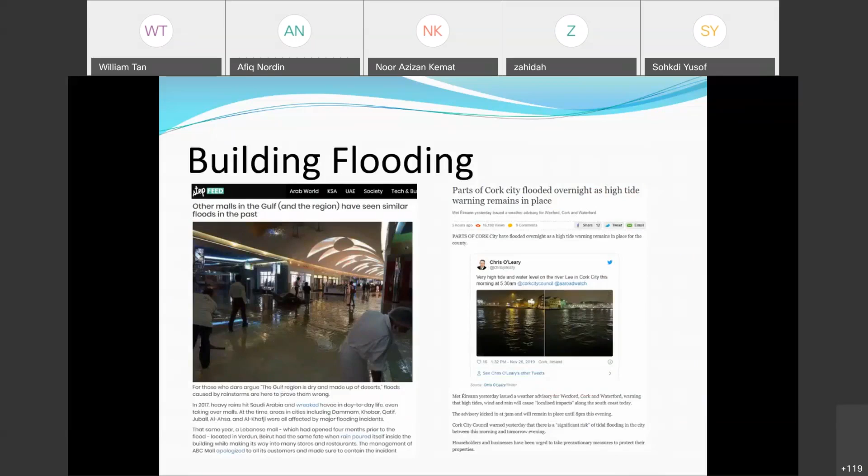Flooding can also occur when the water is coming from the sea. So like in this example in Cork, Ireland, you got flooded because of the high tide. So these are some pictures from various places that you can see.

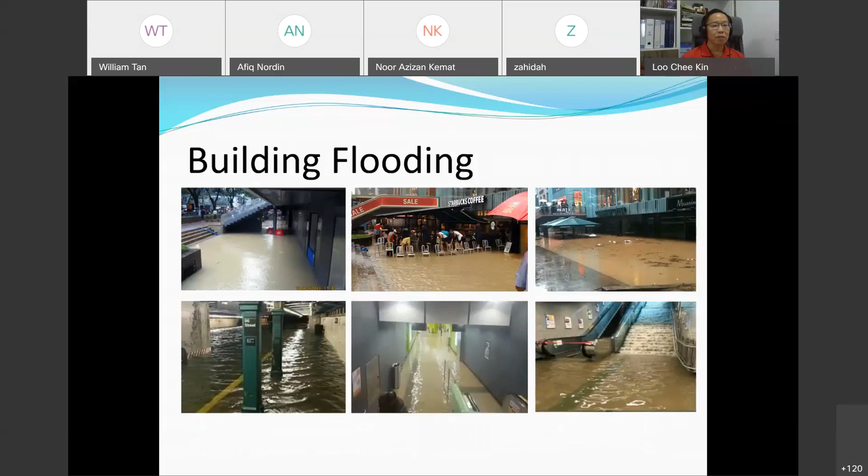When flooding happens, it causes a lot of inconvenience to people. There's also a lot of economic losses. Being insurance people, this group here, we're very interested in the damaged goods caused by flooding, interruption to utilities, infrastructure.

So what is flooding? This is a very simple definition. In a very simple definition, I'm not talking about what is in the policy wording, but flooding is basically for laymen and for all of us simple people, means that flooding is where water is not supposed to be.

And the second definition is water at the wrong place at the wrong time. That's called flooding. So when the rainwater comes down in the agricultural field, it's a good thing. But when too much comes down, like China now, it becomes a flooding issue. And this is where flooding, the simple idea, is too much water.

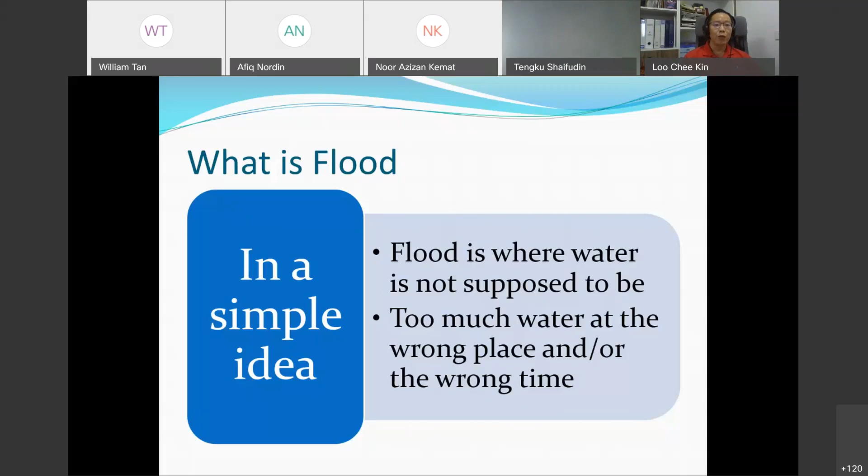So what are the types of flooding that we see? It's due to heavy rain, inadequate drainage that causes a lot of flash floods in our context in Malaysia, tropical storms, so it can be typhoon or hurricane that brings a lot of storm surge as well.

There's also failure of protective devices, failure of dams, disused mines, aquaculture ponds. There's also high tide, like I mentioned earlier. And the only mechanism of flooding that in Malaysia we don't get is the melting of snow. But all other forms of flooding, we do get it depending on where you are in Malaysia.

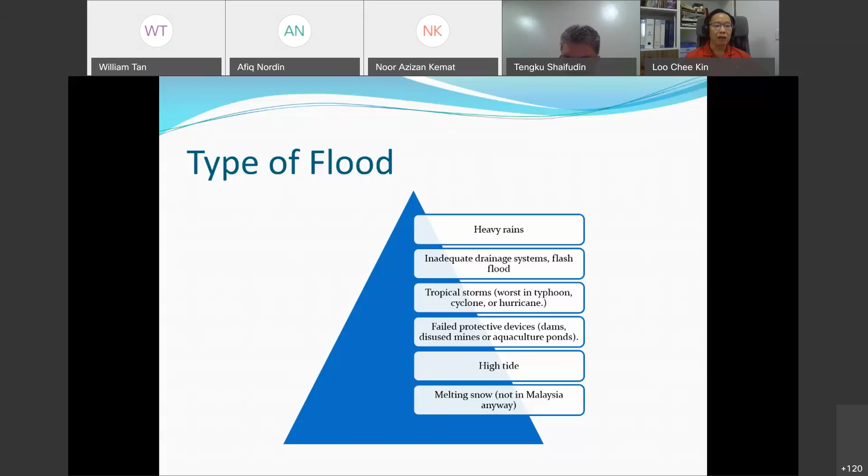So there are various strategies that are formulated and put into place for flood mitigation. Naturally, if you raise the building high, everything is built high, then you're out of the flood zone. So ideally, some insurance companies will say build it above the 500-year flood level.

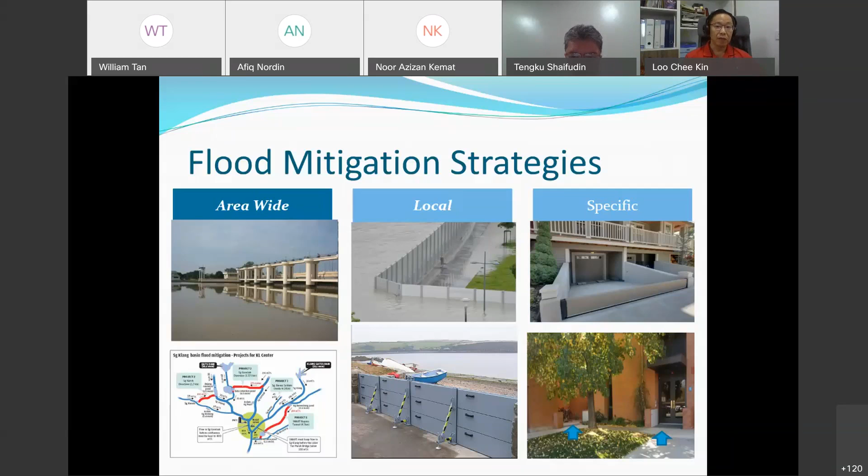But in any flood strategy, you always must look at the practicality. So for example, somebody built a bund around their house. That's good, but you need to drive in, right? You don't want to climb a wall every single day you get in and out of your property. So when you have an entrance and you do not protect that entrance, eventually the property is going to get flooded.

So likewise, if you have a house, you say, I can put in sandbags. There is a limit of how much you can do with a sandbag, because like I said, after the flooding, what do you do with all that sandbag?

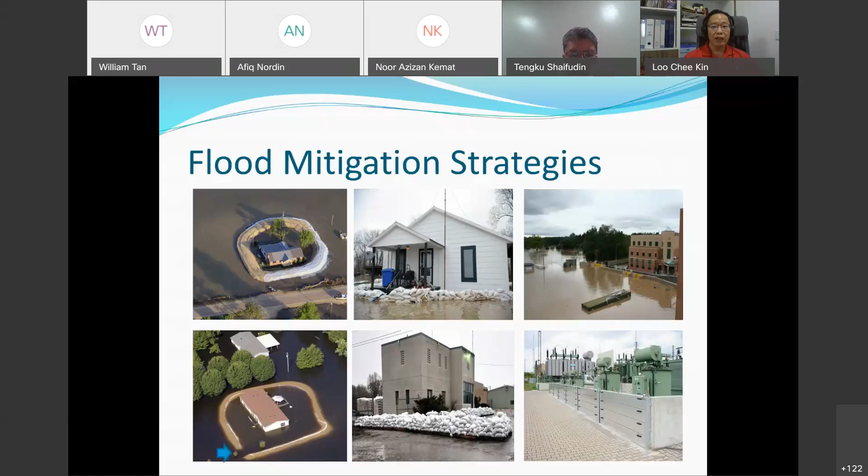Now, is it that difficult? Well, surprisingly, sometimes even when I talk to my fellow engineers, engineers tend to over-engineer the solution. But it's not the case because water follows a very basic principle: water always flows downhill due to gravity, and it always tries to take the path of least resistance. So if a solution can be found to divert or block the water, that's great.

Now, the bad news is that if water gets into any space, fluid mechanics kicks in and it will move together and fill the space. So if you have an underground space with even a very small opening that you do not protect, the water is going to eventually flood the whole basement. That's what you see in some of the earlier pictures. Underground subway stations get flooded quite badly because water gets in through the staircase, and not only do you damage the building, you will damage all infrastructure within the tunnel as well.

So that is why below grade space, especially from an insurance perspective, is given a lot of attention, because clearly it is below ground, so rainwater or flood water is going to come from the ground. When this water gets into that space it causes a lot of damage to the building because, as we know, ground floor is a premium. So by design, architects like to push utilities and everything down to the basement, including car parks. And in today's world, many customers would actually use those underground spaces as storage as well, for their archives, for unused furniture, like in hotels and F&B businesses - they always have that sort of storage in below ground space.

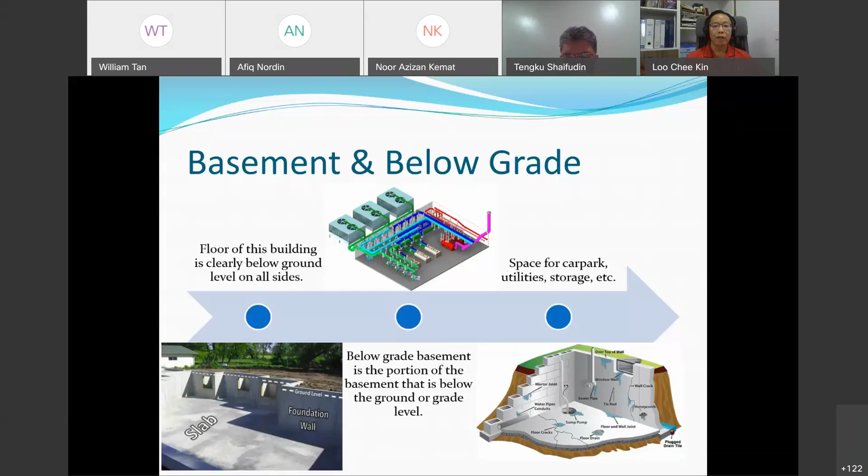Now, when you have below ground space, there's a lot of potential where water can seep through. Like you can see in that picture on the bottom right, you have cracks, floor drains, openings for fresh air - all these are potential spots where water is going to seep in. So as the overall basement and below grade protection strategy, we need to look at how you prevent water from getting through those openings, the windows, the ramps, the doorways, and even any sewage pipes that may be connecting from the building out to the public system.

So these are the overall strategy of flood protection. You need a perimeter barrier - this can be permanent or temporary, and it will keep the water out of the building. It's designed such a way that it should be sealed together with the building structure or the building opening, meaning doorways and ramps that you may have for car parks. Then you have opening barriers - specific protection that is put in place in those openings.

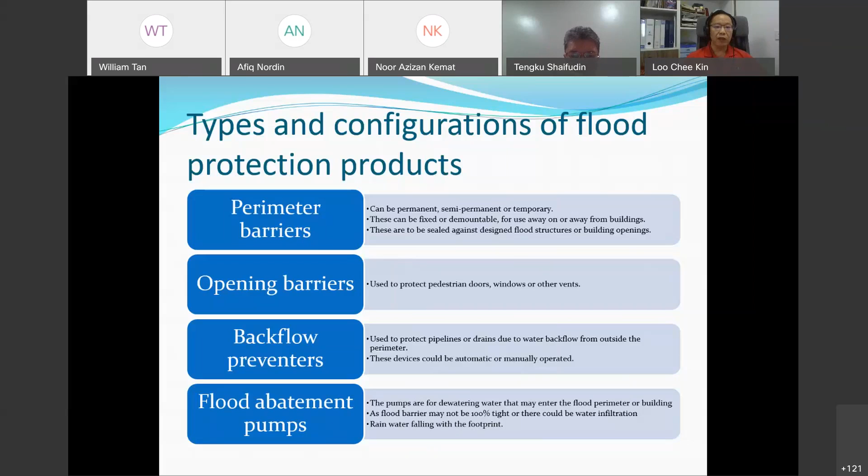So why are we so concerned about flood water? Because people always see videos when the East Coast is flooding and they see kids swimming in the water and think, hey, that's great, I can play in the water, right? But we know flood water is not clean. It has mud, sand, stone, effluents - that means sewage. We have chemicals, because if you have upstream from the plant, a chemical plant, a palm oil plant, they use oils and chemicals, all these will be floating down with the flood water. There's also floating objects, as you can see.

Flood water washes trees and whatever is left on the side of the road, and these become objects moving together with the water. You also have animals inside there - it could be snakes, cockroaches, anything else. And flood water, as you can see, is anything but calm. It's moving, it has velocity, and it has head pressure.

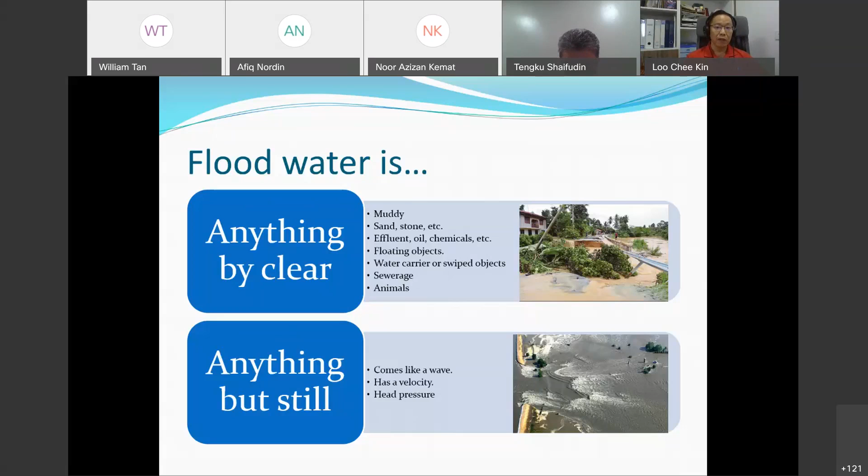And what do I mean by that? So in a very simple sense, velocity can come from something that's moving inside the water, or the water moving itself - that's why it's a big concern. And the head is the pressure that's exerted by the water, meaning the deeper the water is, the higher the pressure is going to exert at the bottom.

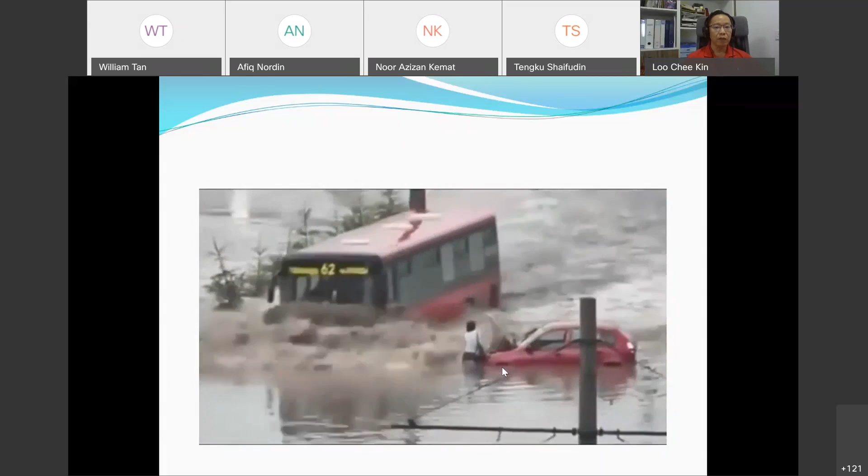Now, I'm not going to go through too much more technical information, but this video can give you an understanding of why it is a concern. You can have still flood water for a while, but you always get that gung-ho hero who wants to drive through the water. And you can see when a bus or truck drives through the water, it's going to displace the water and create a wave.

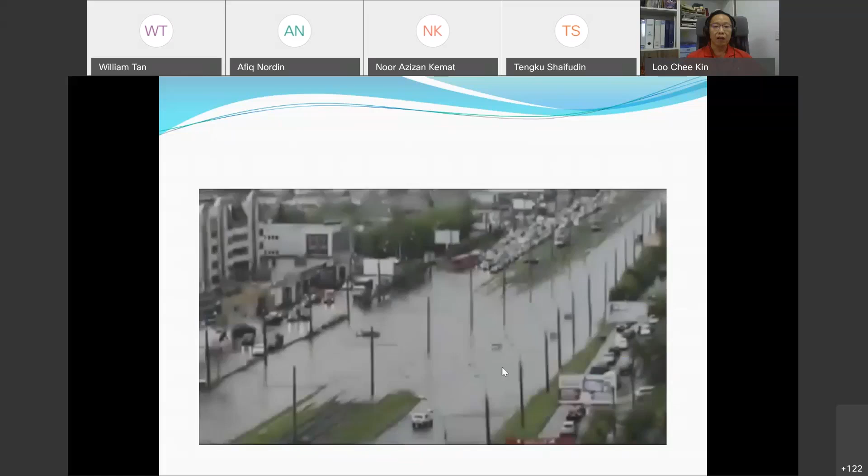So if you have a flood barrier that is not built in the correct manner, and a bus passes by it and causes a wave that breaks it, what's going to happen to the building? It's going to flood it. So that's why IEM created an initiative to come out with this guideline for performance requirement of flood abatement equipment.

So we initiated these guidelines in November 2018, in order to fulfill a need of the industry, because we see there is a gap currently in Malaysia that there is no specific standard talking about how you are supposed to build such equipment, how the manufacturer should build it, how they're going to install it, and most importantly, who tests it, and finally, how do people, survey engineers, give credit to it.

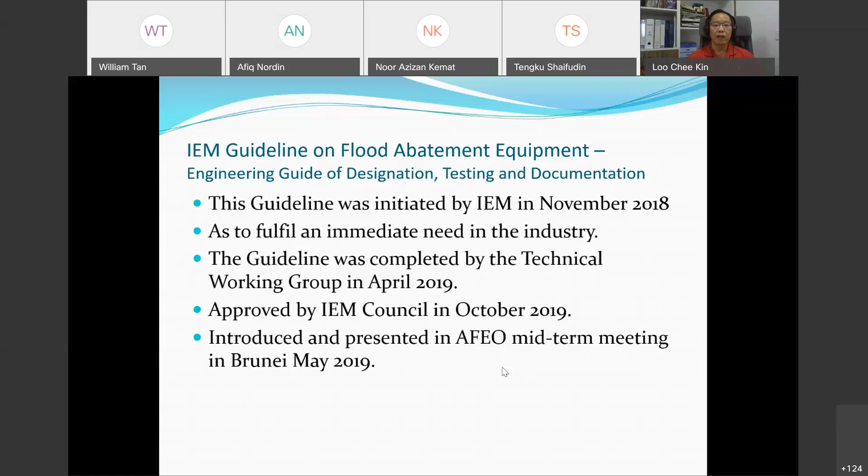So we set about having a few technical working group discussions, and we finalized that document in April 2019, and that document was finally approved by IEM Council in October last year.

So you'll be wondering, what is the purpose of having such tested equipment? It's to try to create a uniform standard so that engineers can use the specification without repeating it again and again. So for end users, they know that this equipment has gone through rigorous testing and will meet the performance requirement. Likewise, for contractors, they know that they don't have to engineer the requirement from scratch because it's already meeting some standard. And lastly, for people like authorities and insurance companies, you know that if this meets this particular guideline, you don't have to go back to scratch and reassess whether it's going to do the job, whether it's going to stand the wave, whether it's going to perform.

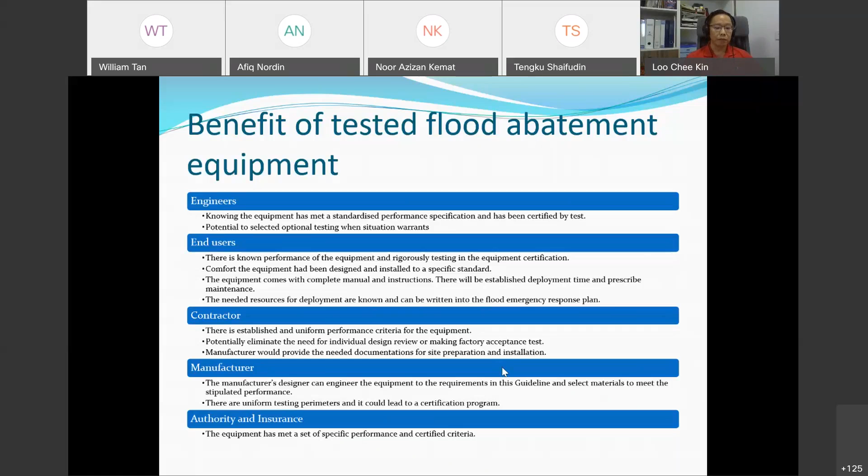So when we set up the working group committee in November 2018, we actually had people from different agencies, people from government agencies, the regulators, professional bodies, and also a representative from PIAM itself.

So a lot of the members, especially the representation from PIAM, we were very thankful because they gave a lot of good challenging feedback as to why we use certain parameters for the standards. And we also had input as to what tests are required to meet the performance. So out of that, we grouped it into 3 broad groups, and within these 3 broad groups, some of these will be what we call required mandatory tests. So hydrostatic testing, that means how high the water the barrier can withstand, is an important factor. So a barrier certified for, say, 1 meter height is only good for installation of 1 meter.

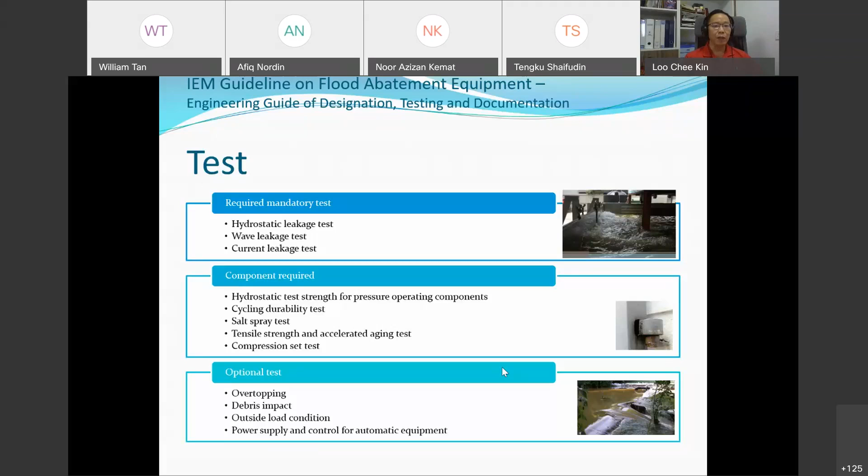So I'm not going to go through the technical detail because I can talk half a day on this. Now, more importantly, is equipment documentation.

In this particular guideline, we spell out very clearly what documentation is needed. So the manufacturer needs to state clearly what is the deployment time.

If the flood barrier takes 2 days to install and the flood warning is only 1 day, it's as good as none. So the deployment time becomes important because, as surveyors, when you go down to site, you look at the equipment and they say, I need so much manpower, but they don't have the manpower and the tools to install the flood barrier. How do you debate with them?

But if the documentation says you need this many people, it can be deployed in 3 hours, and these are the tools required, that's fine. That's how we can give credit to it. So the tools, everything, if it's a complicated system, should be documented so that the end users have that equipment in hand.

Now coming to the last few slides here, we also included some appendixes in the standard itself. Appendix A is talking about the testing facility. B is talking about how to design. C is the climate change factor. I mean, we are all very concerned about climate change.

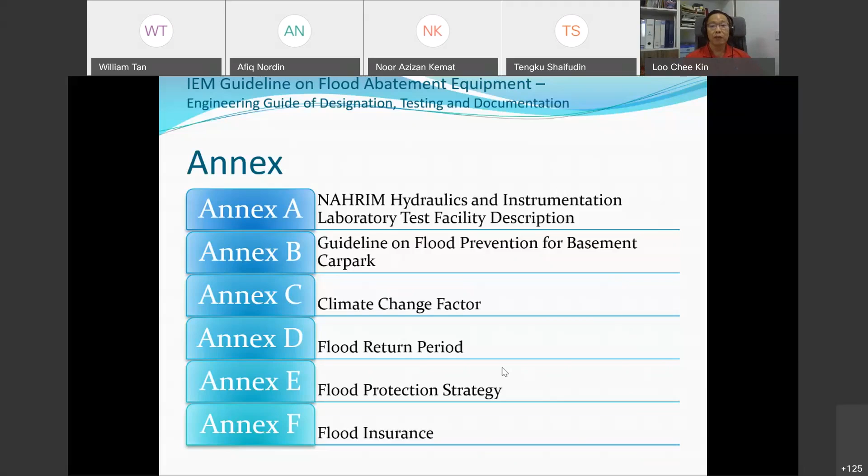So this is NAHRIM. They actually have a full-scale testing facility in Seri Kembangan. As part of the working group, we actually paid a visit to NAHRIM and looked at their facility. So Malaysia actually has a facility able to test such equipment if the manufacturer is interested.

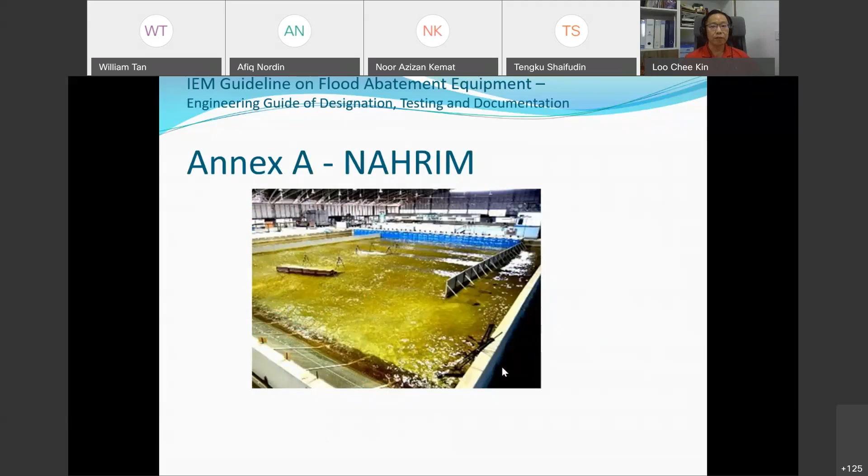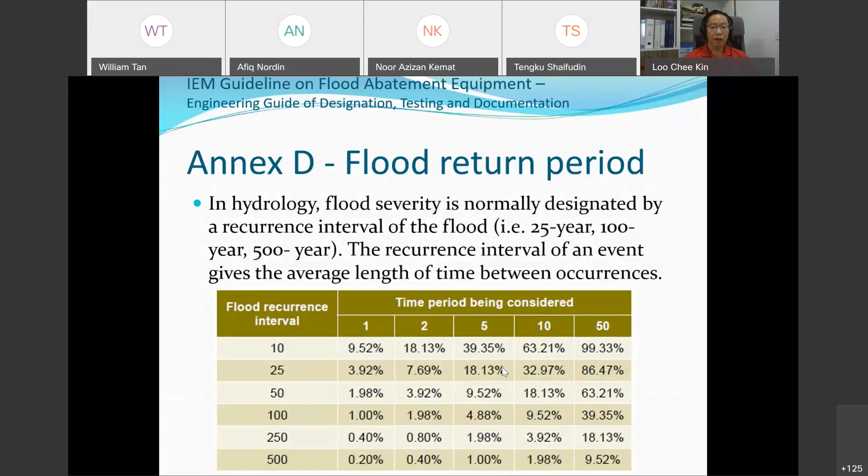We also provide background information on the climate change factor, referencing documents that engineers or manufacturers can use. We will explain the concept of return period, but I believe for this group of audience here, I don't need to present this, because we have underwriters and surveyors who are very well versed in this.

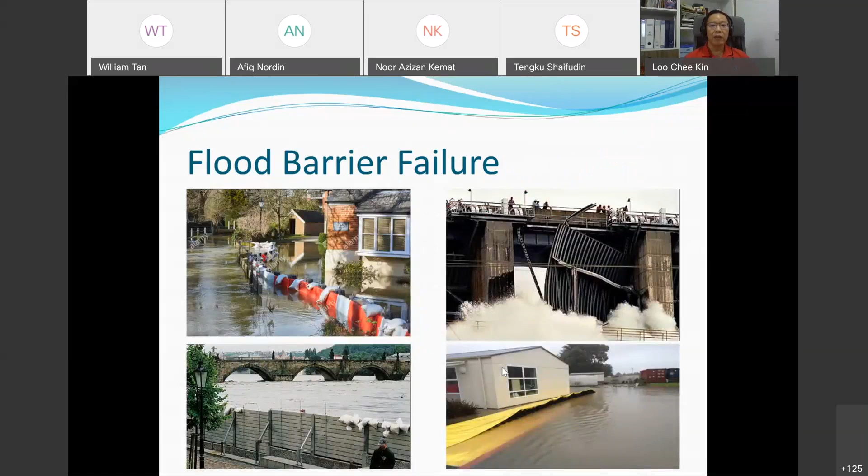So our main concern in putting together this standard is flood barrier failure, because flood barrier failures affect everybody—the community, the person, the family—and ultimately, if it's an insured property, the insurance people will have to pay for the loss. So we want flood barriers to be credited when they meet a certain standard.

So lastly, as a summary, flood can be predicted and mitigated in most cases. There are varied and many different engineering measures put into place, many flood solutions to mitigate and limit flood damage. But having product conformance and certification gives end users peace of mind that this has been tested and verified by a third party. If you go around, you can see a lot of do-it-yourself flood barriers that may not meet the job, giving a false sense of hope to people.

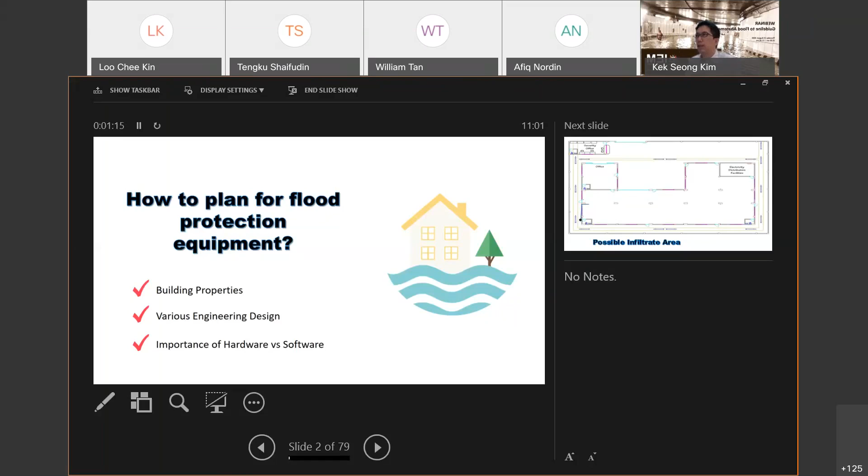Like just now, we talked about the flood barrier. When it comes to testing standard, Engineer Loo has already explained that to you all. Now, how do we apply it to the property? That is the application issue. So we want to explore how we use it effectively to protect properties. There are various engineering design considerations and the importance of hardware and software as well. What we mean by software is a person, a program that makes the flood abatement equipment become useful and effective. So let's take a case study.

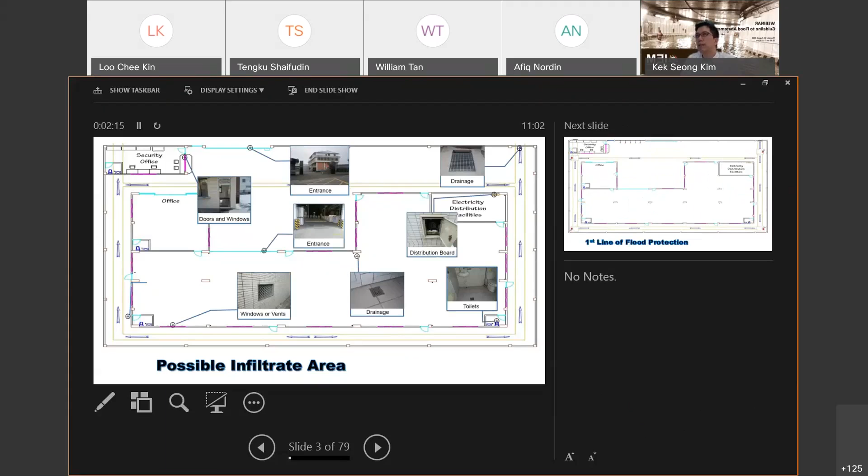For example, this is a typical layout of a plant. If we look at the plant, we know this is a potential flooding area. What can we do with it? So what we normally do is analyze the place. This is an outer barrier, and this is a building barrier, so we put it into two different perspectives. First, we look at the outer layer: water can come in from the entrance, from the drainage, from the doors and windows. For the inner layer, water can come in from the building entrance, distribution board, window and vents, drainage, and toilet. So these are the possible areas where water can come in.

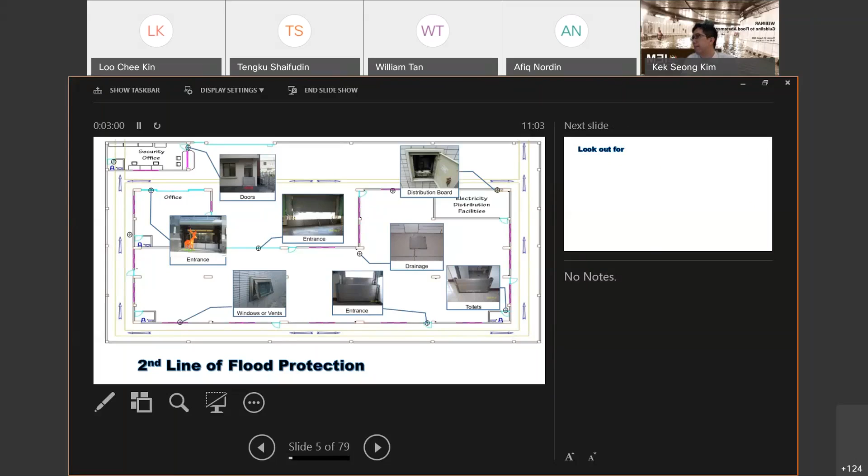So when we want to apply that, we have to look out for whether the strength of the wall is sufficient to take care of the hydrostatic pressure or not. Not only the equipment itself - because if you build strong equipment but the wall cannot withstand it, the whole thing will collapse. Look at the cracks and holes on the wall, pipes and drainage, and make sure we have a pump to pump the excess water out from the building to outside the barrier. If there's a puddle of rain indoor, use a catch basin and water pumps in the factory to drive the water out. And connecting pipes like stopcock drain cover pipes are good to have to stop water from flowing in.

And for the ground pipes, we can apply sealing foam to seal it off.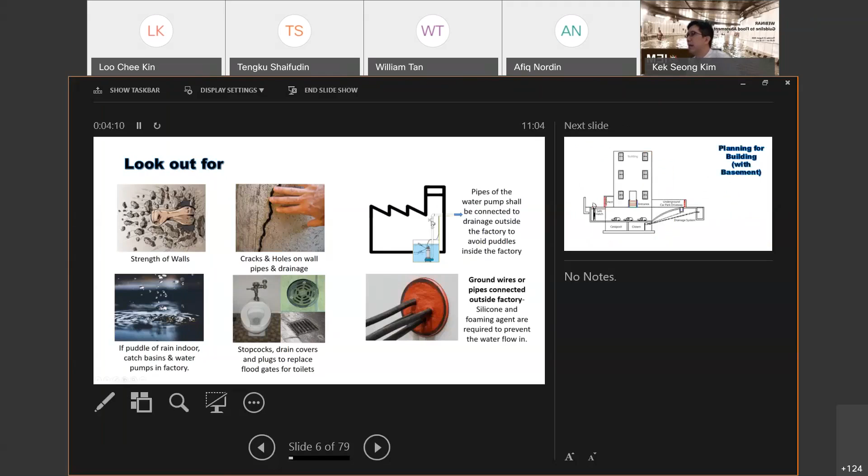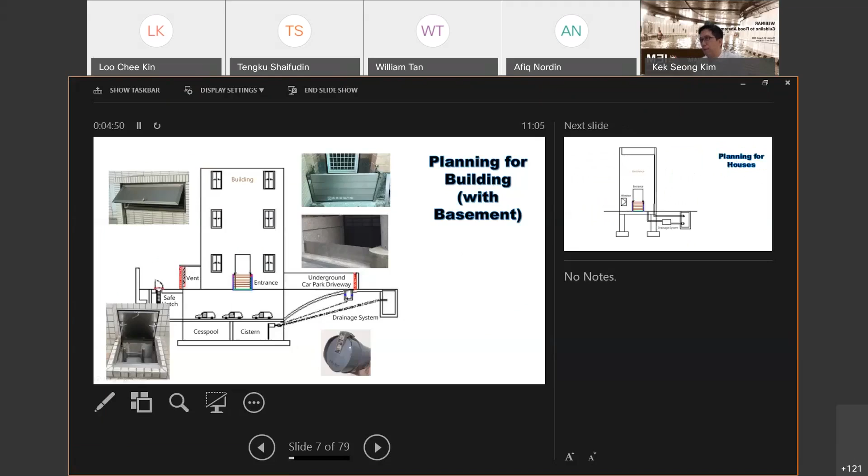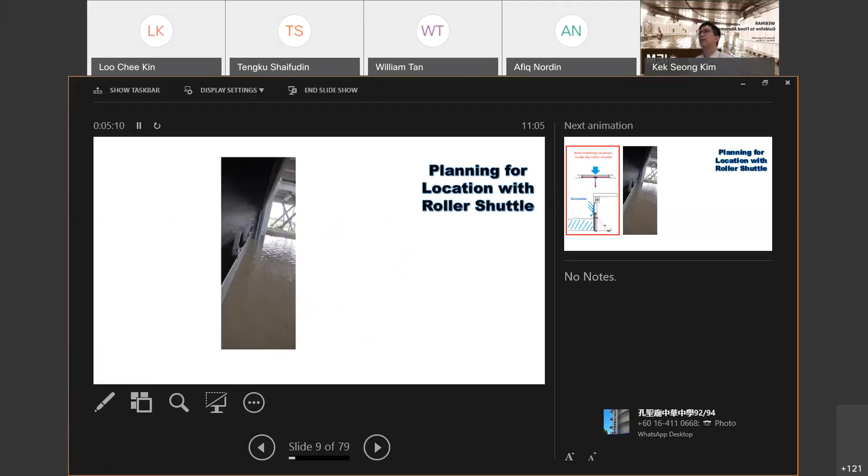So for a typical building, when we look at it in 2D on the vertical side, we can see if there is a basement. What we can do is have the window, the floodgate at the entrance, underground car park, driveway, the hatch door, safety hatch here, and a non-return valve. Then for normal houses without an underground area, it's rather simple. But if you're dealing with a factory or warehouse, you have a big roller shutter, so we should also consider whether to keep the floodgate before or after the roller shutter.

So there are some pros and cons. The best recommendation is to have the roller shutter outside against rainwater, and only inside do you have the floodgate. This helps prevent the splashing of rainwater. Whereas if we put the floodgate in front of the roller shutter, chances are rainwater passes through the floodgate, and some water still seeps through the roller shutter. So this is something we can look into in fine detail when planning for floods.

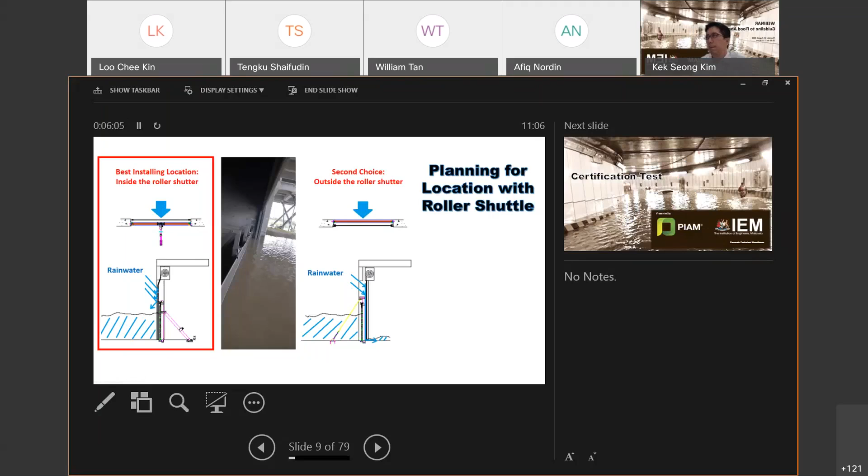Certification test: I have some documentation of the real tests that have been done. For the window, the impact test is done like this. For the sluice gate, the impact test is done like this, and for the demountable floodgate, the impact test is done like this.

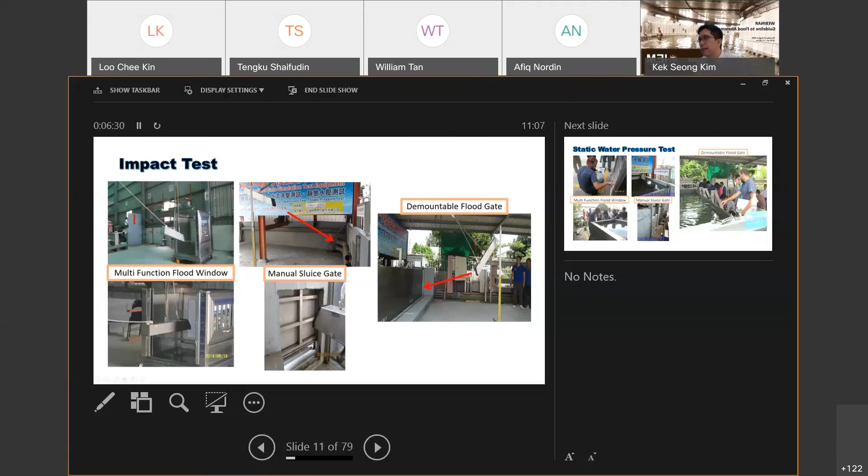Static water pressure test: the water is filled up to the max, and then after an hour, 24 hours, or 48 hours, we see how much water seeps through the gap in between. So this is how the test is being done.

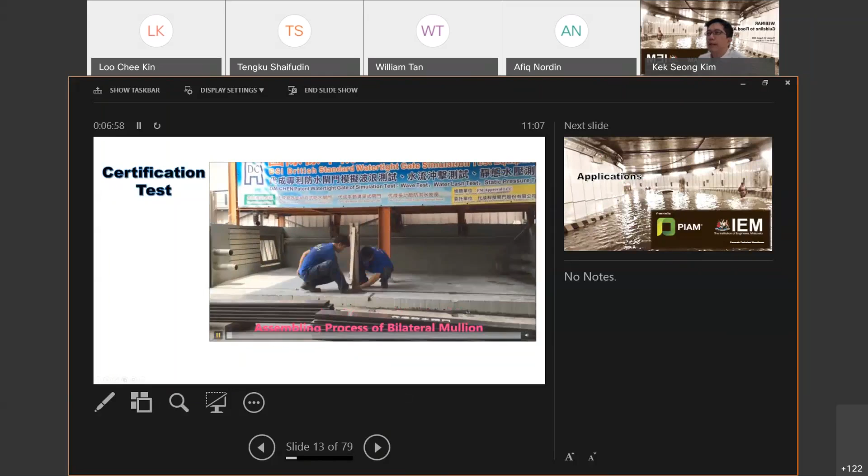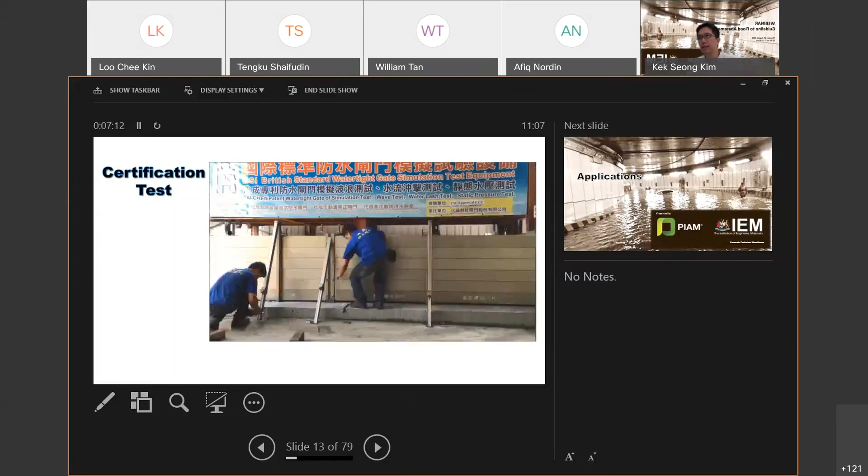When we want to do a test, the inspector will witness how the things are being assembled, whether it is repetitive or not, whether it can be reused or not, and how much time it takes to fix it up. Then here, we discharge the water.

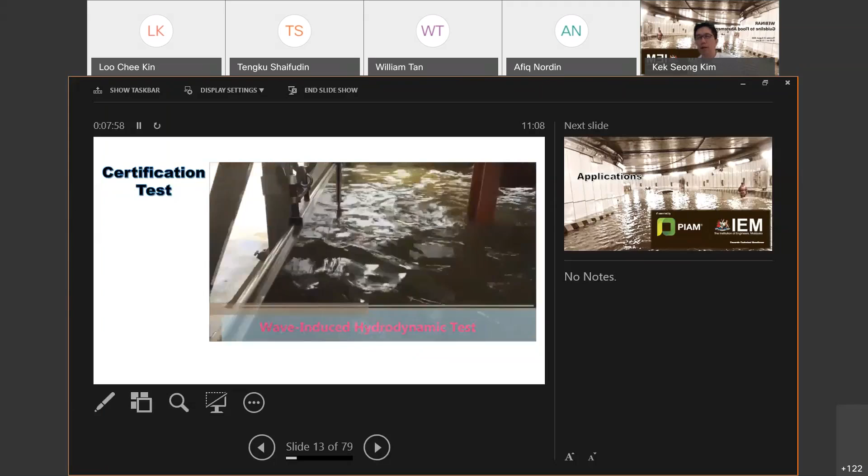Kim, can you show full screen? Your slide screen is not very clear. Sorry, you selected the wrong screen for the presentation. Can you switch the screen? Yeah, how to do it? Let me see.

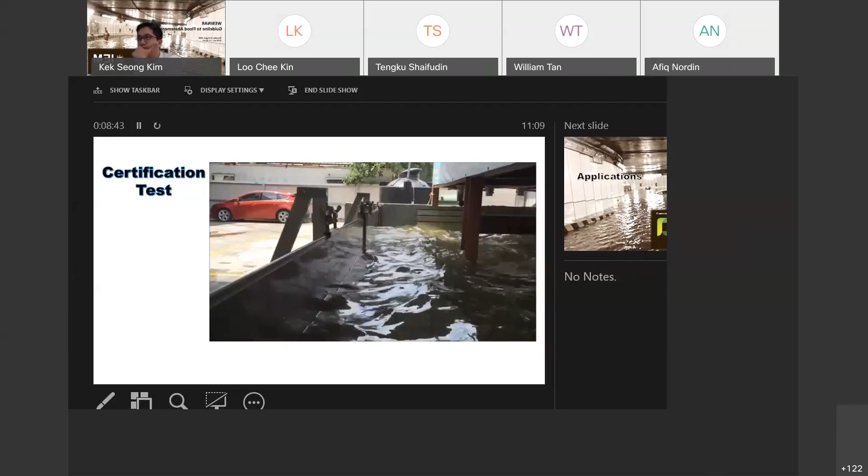You are not seeing the video? Are you all seeing the video? No, not at the moment. The pictures, but not the video. Okay, how to share the video? If you're working with two screens, you need to switch the presentation screen. Oh yeah, I'm working with two screens. So I should share screen two, right?

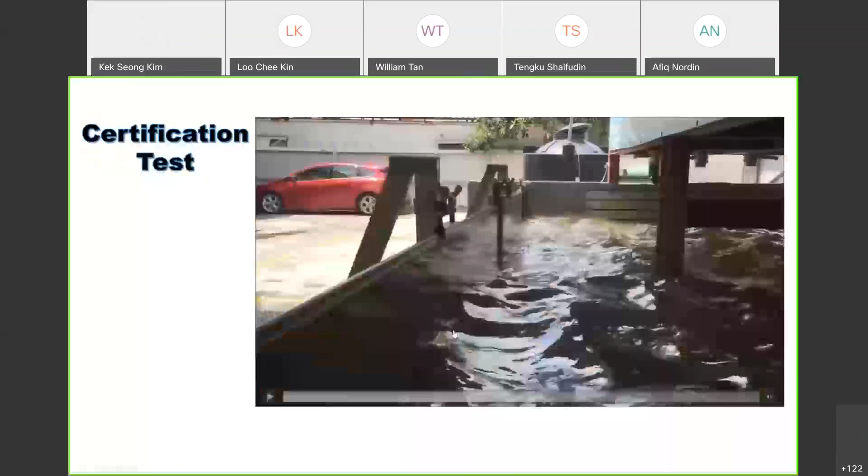You all see the video now? Yes, it's full screen now. Okay, sorry, shared the wrong screen. I'll restart the video.

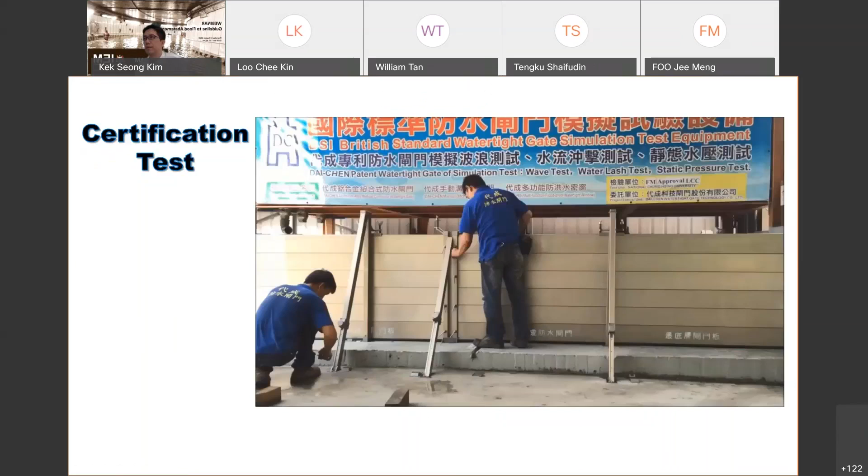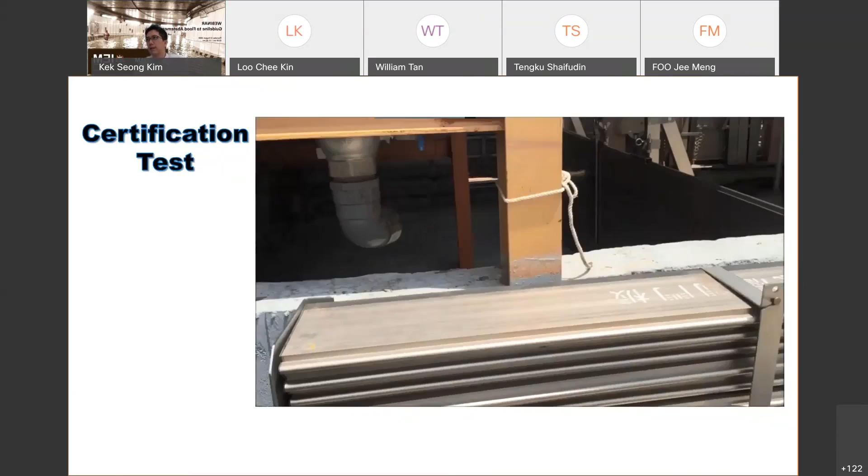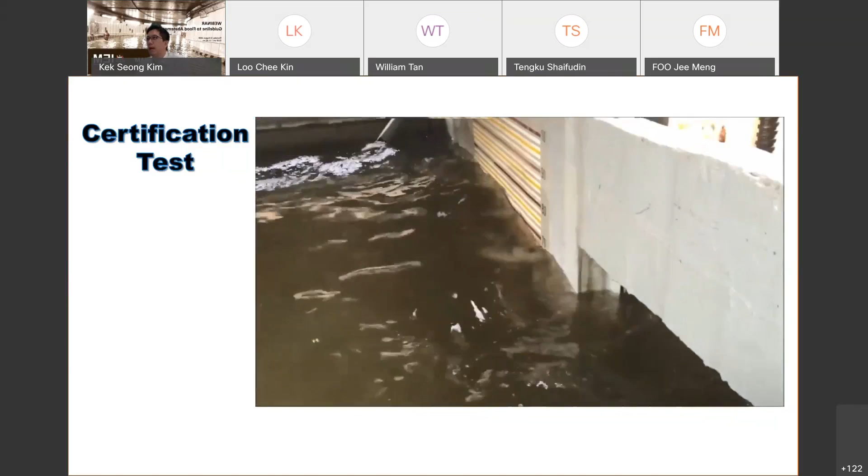So this is a test done in the witness of FM Global, an international company that also has the flood abatement standard. When they inspect and give accreditation, they want to make sure that the process can be done repetitively. This is a hydrodynamic wave test, creating the wave to make sure the flood barrier can still withstand the wave pressure.

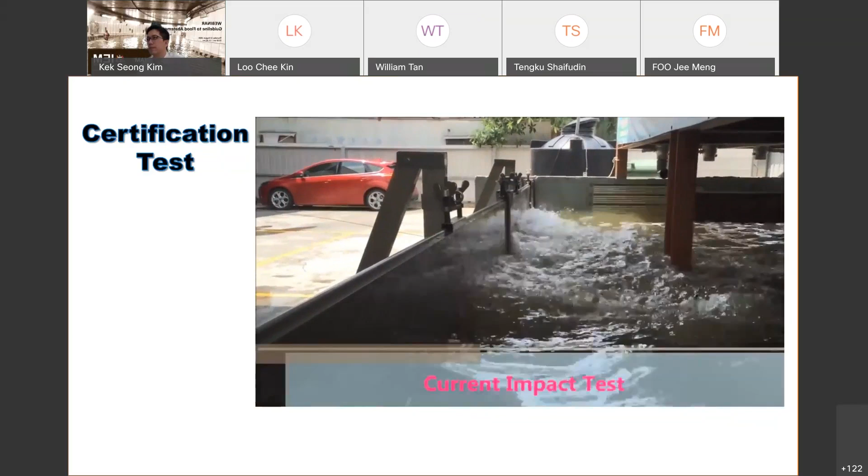This is the current test. The site creates fast water with a pump to simulate the current. This is the hydrostatic test.

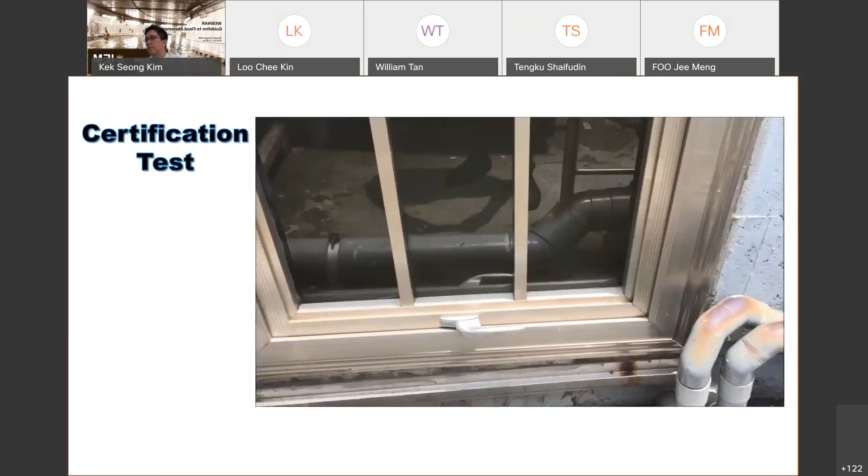And then this is the impact test being done. After the impact test, still no water can leak through. So that's how the certification is being done.

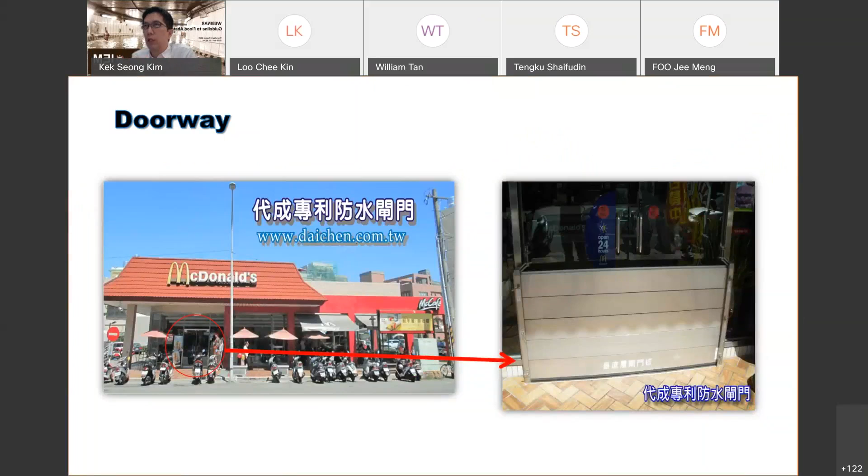When it comes to application, the design of where we want to apply it on the building depends on the creativity of the designer. So it can be at the doorway, the rearway, the wall extension, topping up the wall, as a window, riverbank, driveway, or entrance. That depends on the design application, so there are countless possibilities—you can design it yourself.

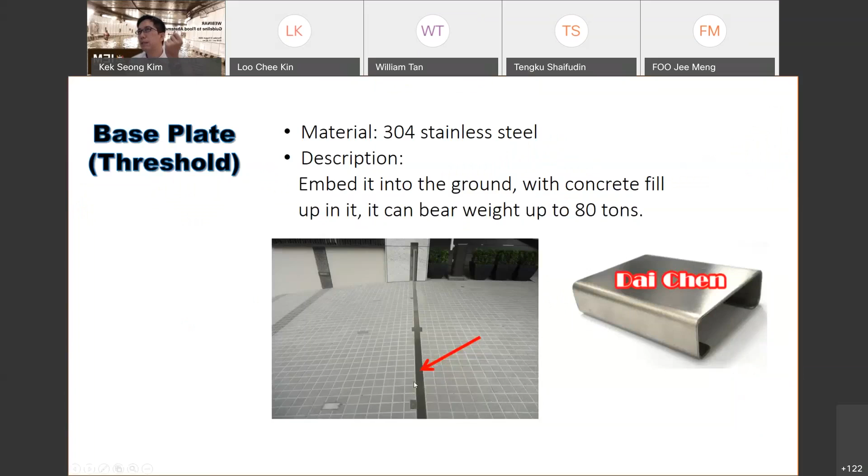The next one is the component design. We want to understand how each part, each component works. So you see, we have a base plate. The base plate is there to make sure the gap is sealed properly, and it's made of stainless steel.

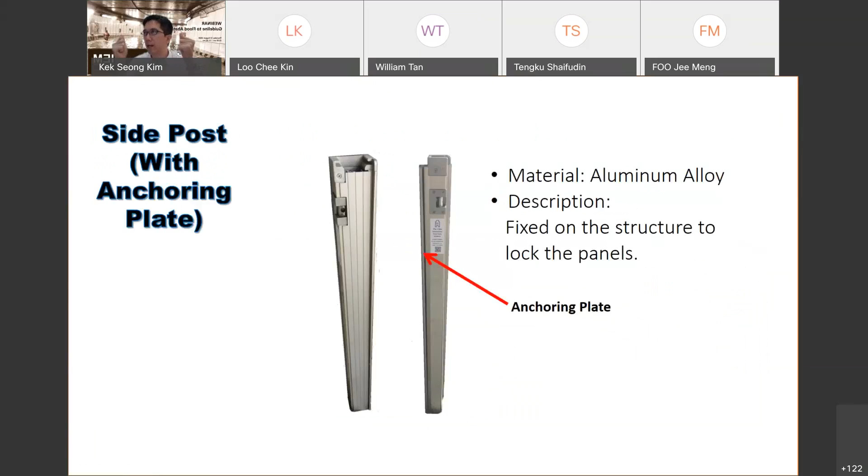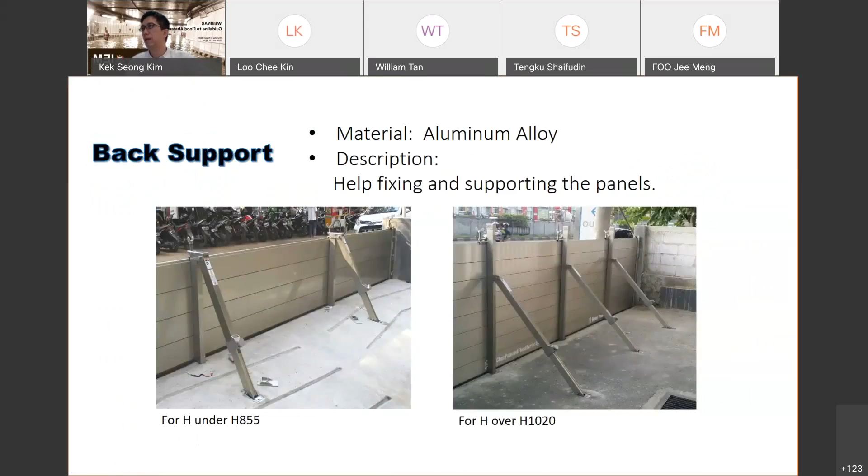When we want to install it in a very wide area, we need a middle post. We also have a back support to counter the pressure from the water, and this is the base to lock the pole, the post. The tightening lock is used to put pressure down on the plank so it can secure the seal.

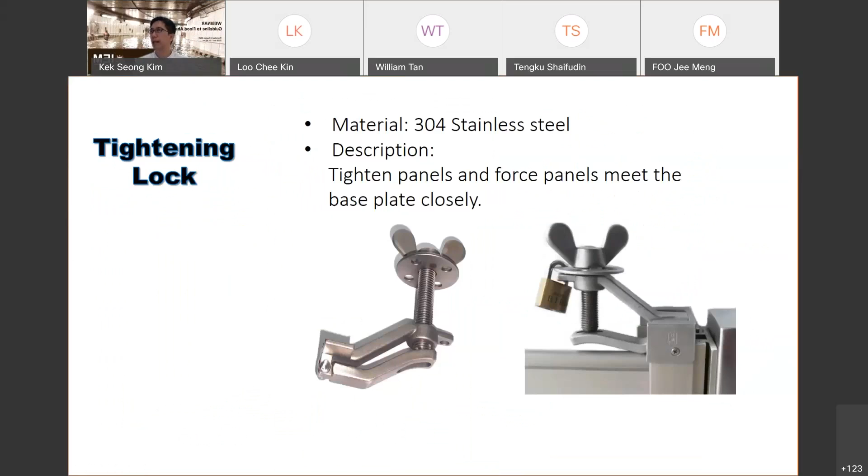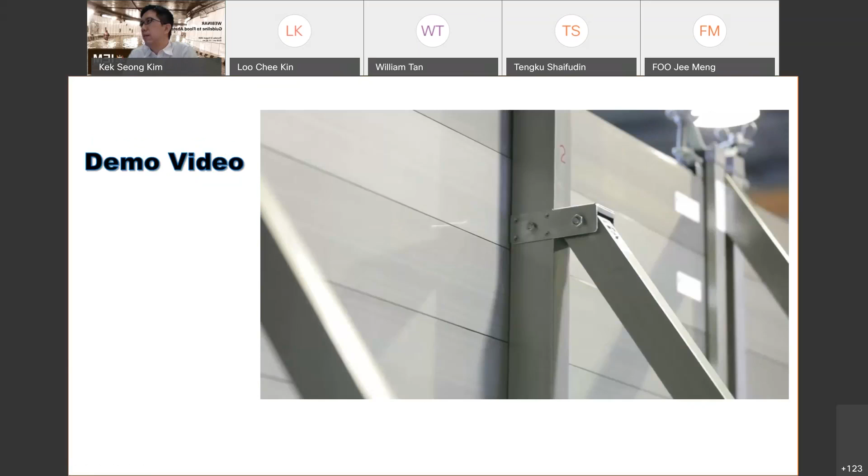So this video will show you how it theoretically works. This is a very simple video done by a Taiwanese company explaining how it works.

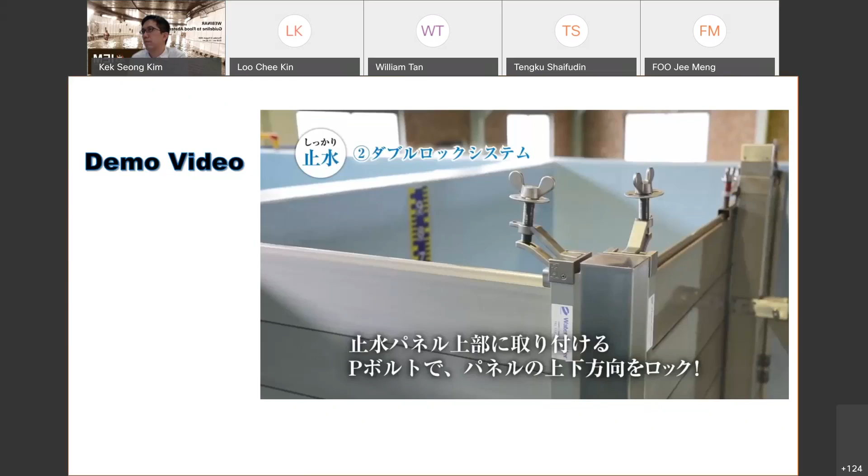This is a tightening nut to press the plank down.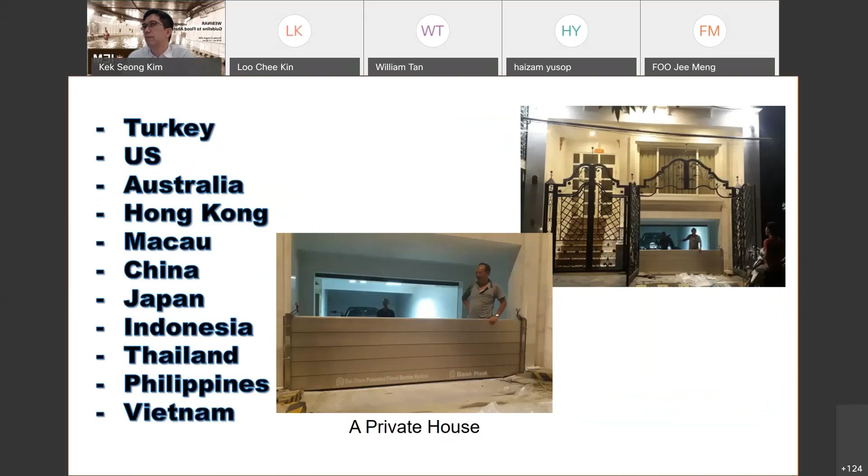When it comes to flood abatement, it's actually very important to have the software in place as well. That's why on-site drill and training is an integral part of the program. This is very important—if you put something in place and people don't know how to use it, or when you want to use it, it cannot be used, this is equal to none. So training is very important.

Flood doesn't happen every day, so when you want to do it, sometimes you forget. Training posters are important to refresh the mind of the operator. We also provide videos for the users as a reminder, for yearly or half-yearly trainings, so that they do it again and again until it becomes ingrained in their minds. Then you don't get panicked during the flood.

If you look at the whole process, for this size, it will take less than 3 minutes to fit everything.

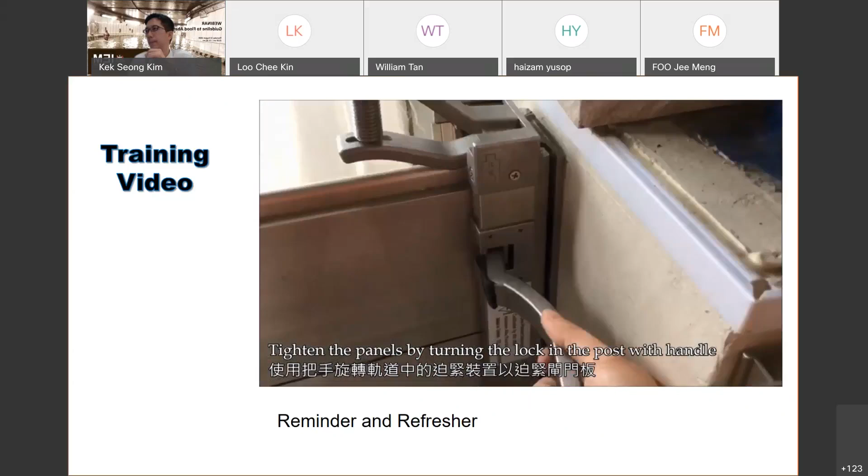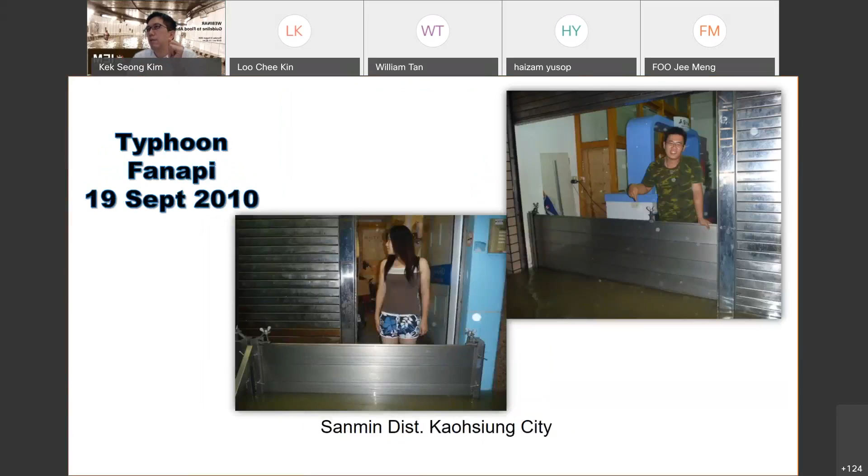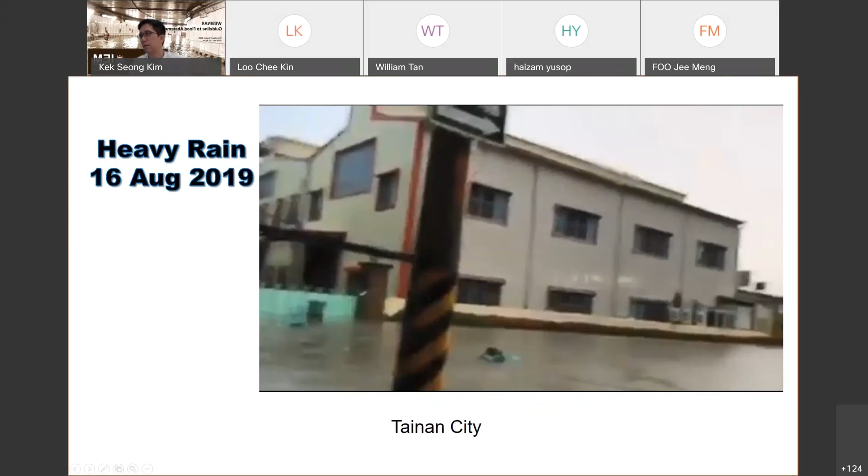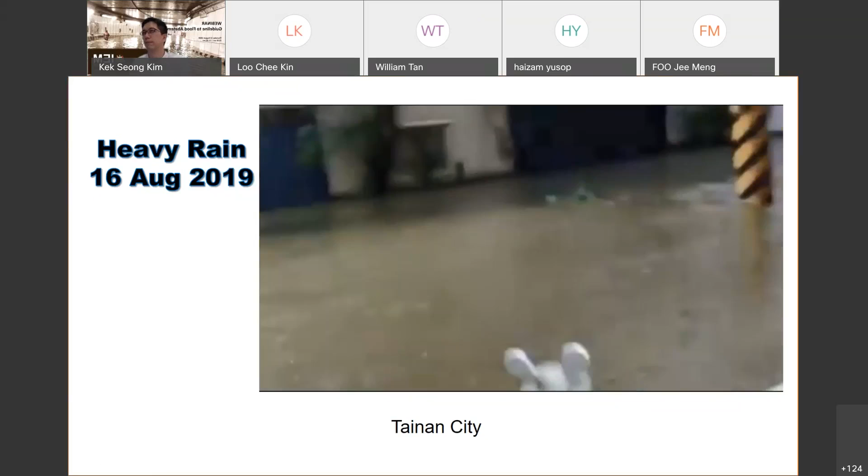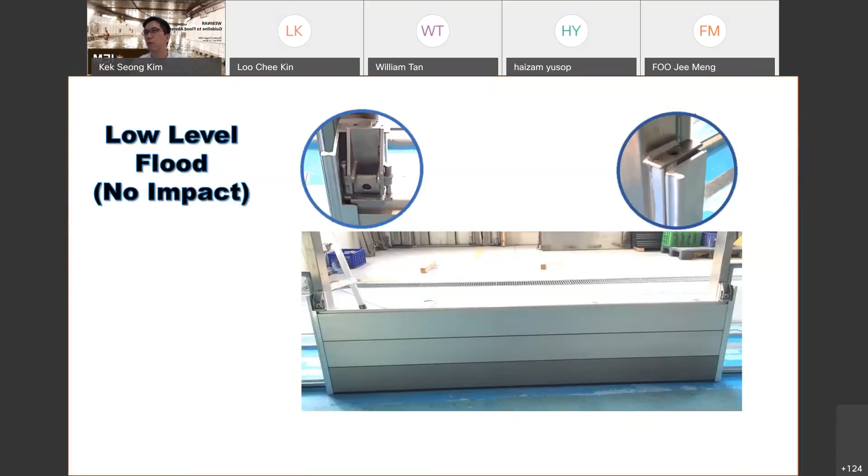So for this technology, as we just talked about, it depends on the creativity of the designer. You can have a different one, a simpler one with a low level flood barrier, the window, the sluice gate, water hatch door, watertight door, swing gate, or electrical hydraulic barrier.

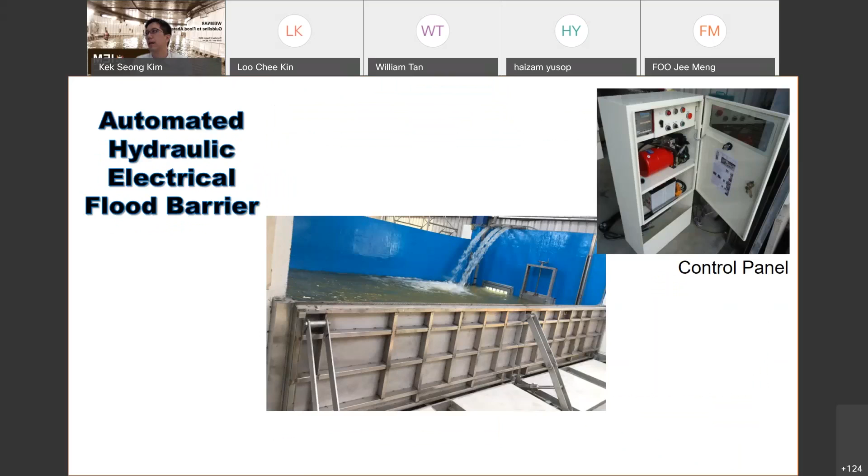So let's say you want to make everything automatic. You can install a sensor at the lower ground area. When the sensor detects it is deep inside the water, the gate will lift up itself, so you don't need anyone to operate the gate. It's fully automatic.

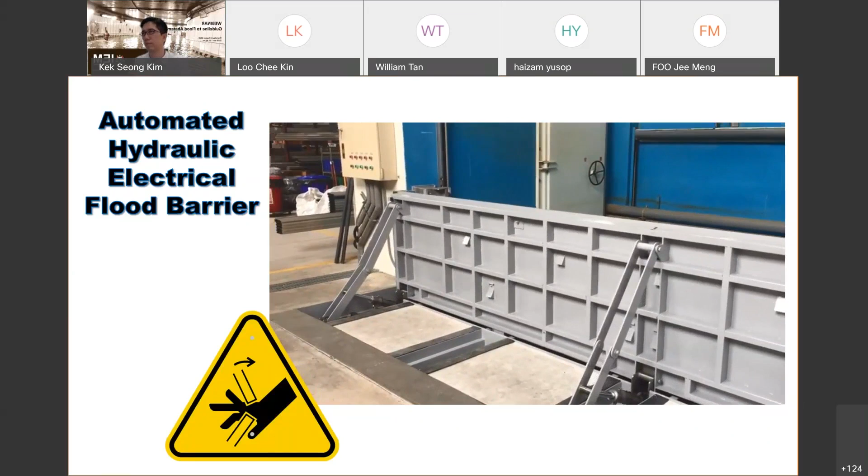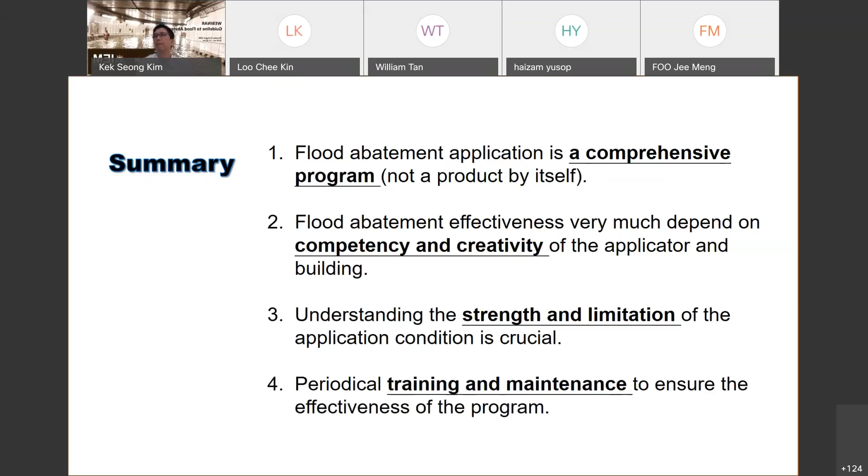In summary, flood abatement application is a comprehensive program, not a product by itself. A program consists of hardware and software, so flood abatement effectiveness very much depends on the competency and creativity of the applicator and the building itself, because different designs require different ways of protecting it. Understanding that every product has its strengths and limitations, and applying it to the right condition, is very crucial. Periodical training and maintenance are also needed to ensure the effectiveness of the program.